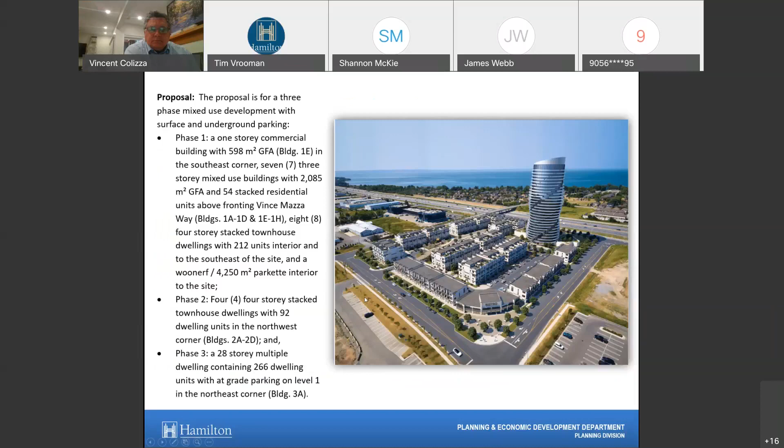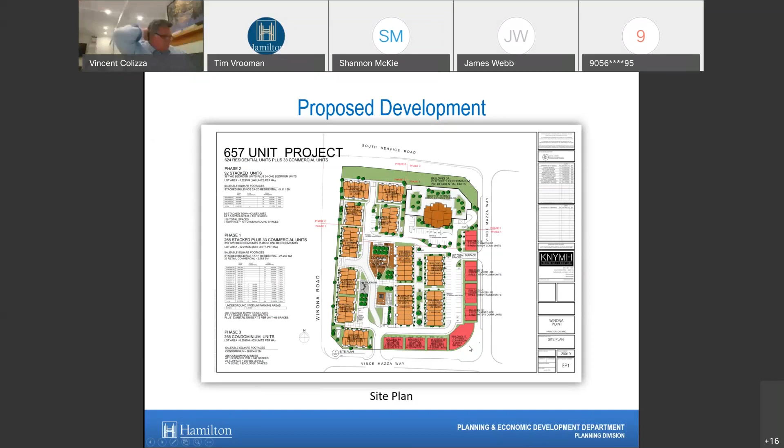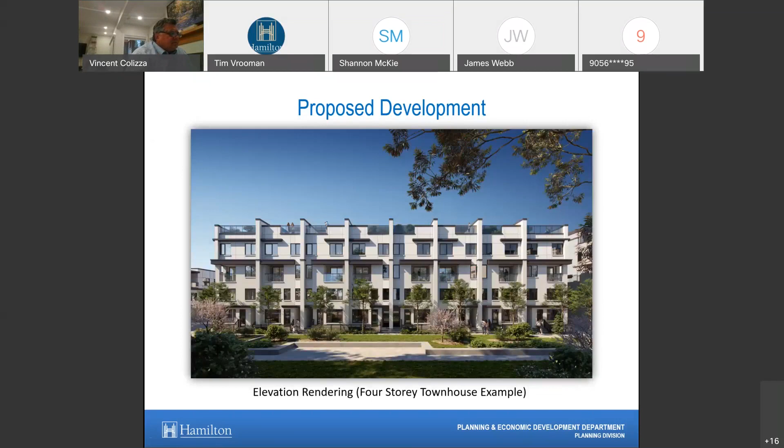This is a sample elevation of the 4-story townhouses included with the submission. Now just moving on to the policy section. This is the site's location, at the intersection of Winona Road and South Service Road.

It's noted that the planned Fifty Road transit and GO Transit and Hamilton's transit hub is located just over to the east along the existing railway corridor at Fifty Road near the interchange with the QEW.

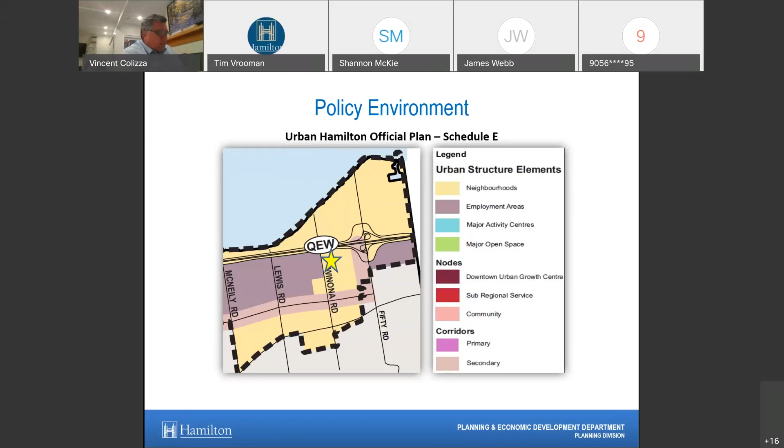The development of this transit hub is considered long term. This is Schedule E1, showing the location of the site again. It's noted that the proposed residential development is located away from established residential areas to the south, across the hydro and rail corridors on the other side, and across the QEW on the north. It's clustered among the employment and commercial lands to the east and west, with those significant barriers in between, the QEW and the rail corridor.

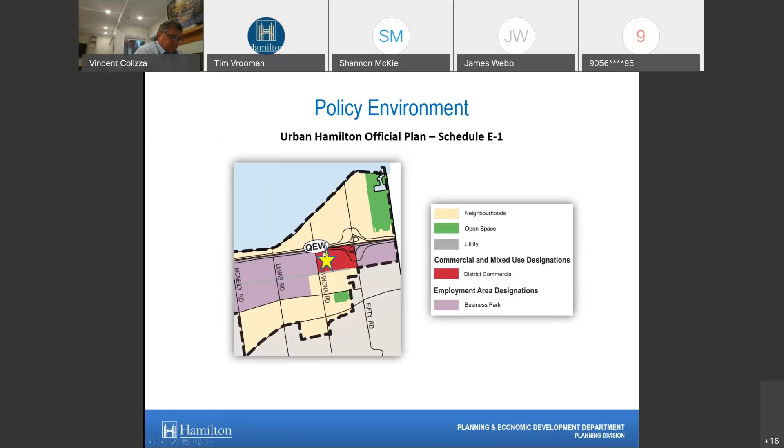From the Urban Hamilton Official Plan, neighborhoods shall function as complete communities, including a full range of residential dwelling types and densities, as well as supporting uses intended to serve the local residents. They're meant to develop compact, mixed-use, transit-supportive, and active transportation-friendly neighborhoods.

It's further designated as district commercial, which is for a range of retail uses intended to serve the daily and weekly needs of residents in the surrounding neighborhoods, and is also a focus of adjacent neighborhoods by creating a sense of place. The district commercial areas shall be planned and designed to be integrated with and accessible from the surrounding neighborhood with a range of transportation modes. The retail buildings are to be located up to the street to create a strong pedestrian orientation.

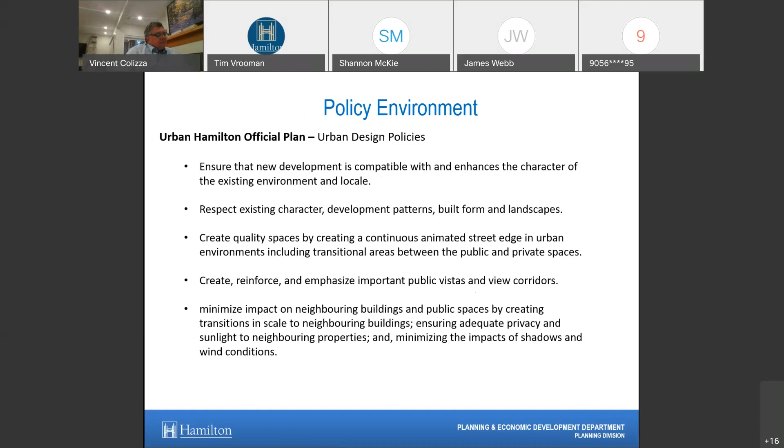The urban design policies speak to ensuring that new development is compatible with and enhances the character of the existing environment and locale, respecting existing character, development patterns, built forms, and landscapes. They create quality spaces by creating a continuous animated street edge in urban environments, including transitional areas between public and private spaces. They create, reinforce, and emphasize important public vistas and view corridors, and minimize impact on neighboring buildings and public spaces by creating transitions in scale to neighboring buildings, ensuring adequate privacy and sunlight to neighboring properties, and minimizing the impacts of shadows and wind conditions.

The property is further designated in the Fruitland-Winona Secondary Plan as District Commercial. It's also in site-specific Policy Area E, the site being located right there.

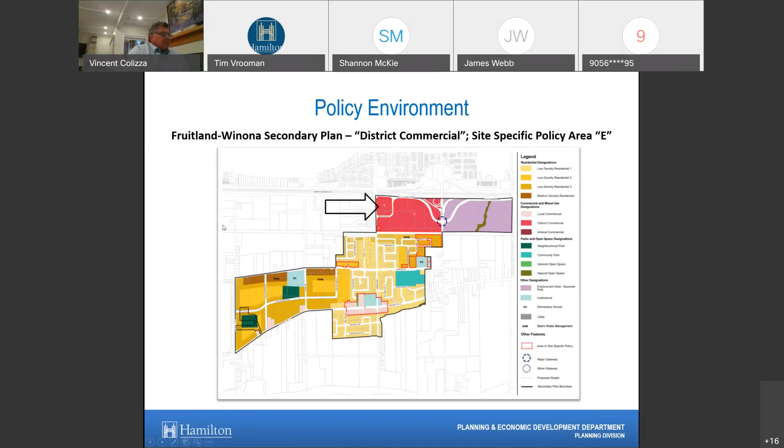Again, with the policy themes, the intent of the district commercial designation in the secondary plan is to provide for larger scale commercial areas that serve the daily and weekly needs of residents in the surrounding areas, ensuring compatibility between different land uses, and protecting the views of the Niagara Escarpment and other natural features. Development shall be designed to protect and address the views of the Niagara Escarpment.

On that note, it's worth considering the height and placement of the proposed 28-story tower, as this would be a significant transformation for the area. Built form, views and vistas, skyline, and microclimate impacts should be carefully considered, including the panorama of the Niagara Escarpment, given the location on the south side of the QEW corridor.

Design policies also speak to creating street and building design that promotes neighborhood vitality, pedestrian comfort, and promotes public transit and active transportation and recreational connections to the site. Principal entrances to commercial uses are to address the public street or through exterior open spaces adjacent.

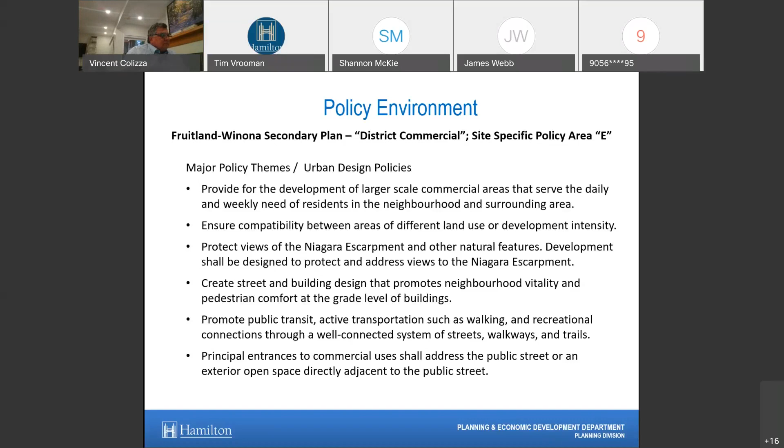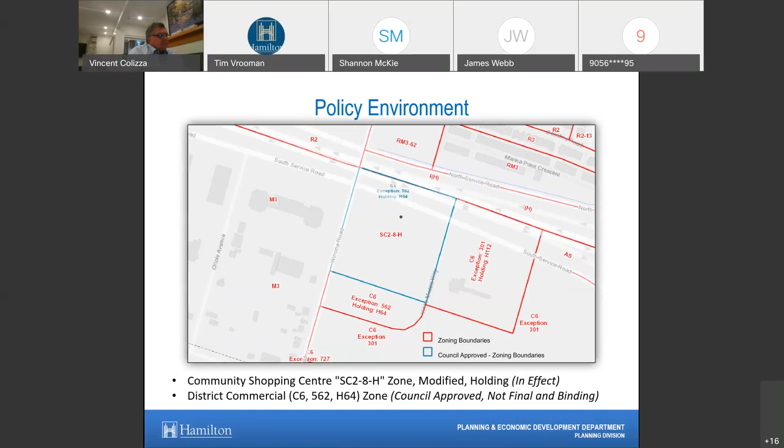The site is currently zoned Community Shopping Center under the Stoney Creek zoning bylaw. Council, through their CMU zoning, has approved the District Commercial C6 zone, but that amendment is not yet final and binding. Looking at the distinctions: the city of Stoney Creek zoning permits retail and service commercial uses, does not permit residential uses, and has a maximum height of 20 meters. The approved zoning under 05-200 also permits retail and service commercial uses and permits residential uses, but the intent is that the zone remains predominantly commercial, with a maximum height of 14 meters.

Lastly, the questions before the panel today: What is the relationship of the proposal to the existing neighborhood character? Does it maintain and, where possible, enhance and build upon desirable established patterns, built form, and landscapes? Does the proposal respect prominent sites, views, and vistas in the city? And does the proposal create comfortable pedestrian environments by locating principal facades and primary building entrances parallel to and as close to the street as possible, including ample glazing on ground floors to create visibility to and from the public sidewalk, quality landscape edges along frontages where buildings are set back from the street, and using design techniques such as building step backs to maximize sunlight to pedestrian areas?

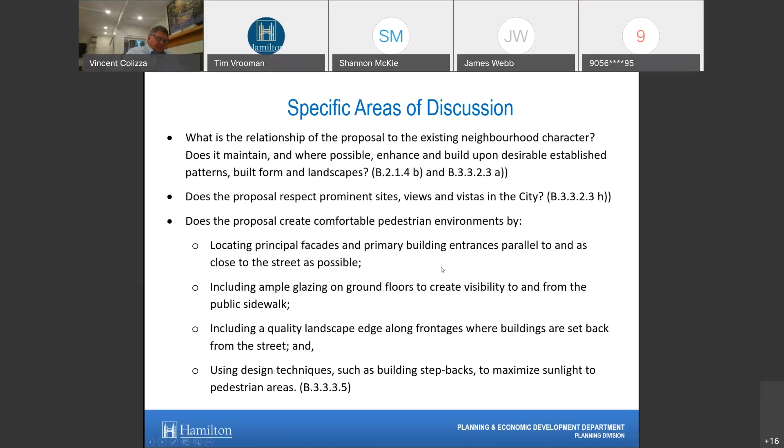That concludes my presentation. If you have any questions, I'd be happy to answer them.

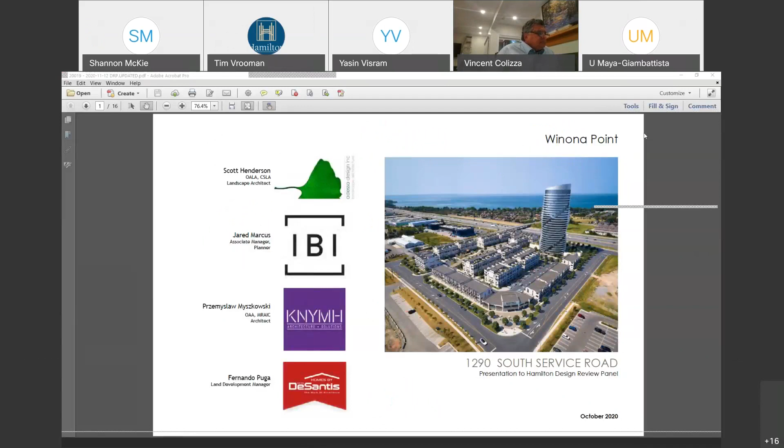I was just going to open up the presentation on behalf of the ownership group. My name is Fernando Puga. I work for Homes by DeSantis. We are joint partners with Melrose Developments and Movengo Developments on this project. We've assembled a team that we think has prepared an excellent concept. I'm going to defer to the team to present to the panel, but I want to thank the panel ahead of time for your time and consideration.

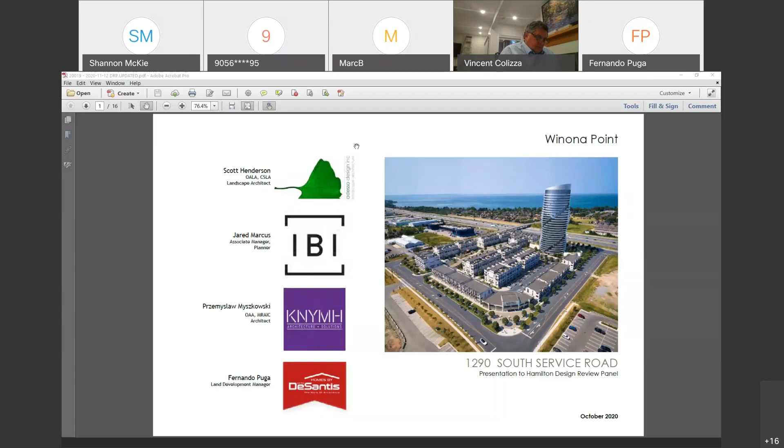I will turn the first slide over to Jared. He's going to discuss the planning and policies that we encountered throughout the design. Jared, I'll leave it to you.

Thank you, Shem. Thank you, members of the panel. Thank you, Tim, for that comprehensive policy overview. As Tim explained, we're located in an area that's largely going through transition in Stoney Creek. You have a mixed bag of land uses surrounding the development: Prestige Industrial to the west, established low-density residential neighborhoods north of the QEW and south of the rail line, and then, of course, big box store typology commercial developments to our south and east.

And the policy context, as Mr. Vrooman explained, is that these lands were converted from employment land uses during the Fruitland-Winona secondary plan process to the current district commercial designation and zoning on the subject lands today. And rightly, he said there are restrictions to the residential types of uses on the lands.

Now, when we were looking at this project, again, we saw it as an area in transition, and it differs slightly from where it was a few years ago when this initial conversion occurred. You now have the introduction of higher order transit through GO Transit at Centennial and 50 Road, and upcoming upgrades to the HSR in the area as well. And so we saw that this was an area that could benefit from the introduction of a different residential built form typology.

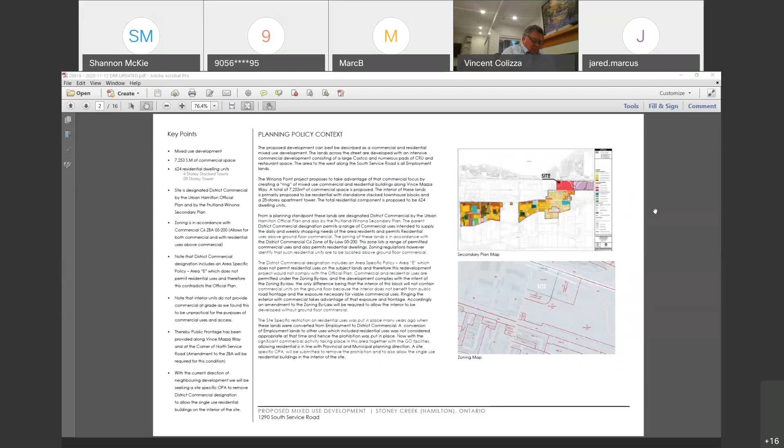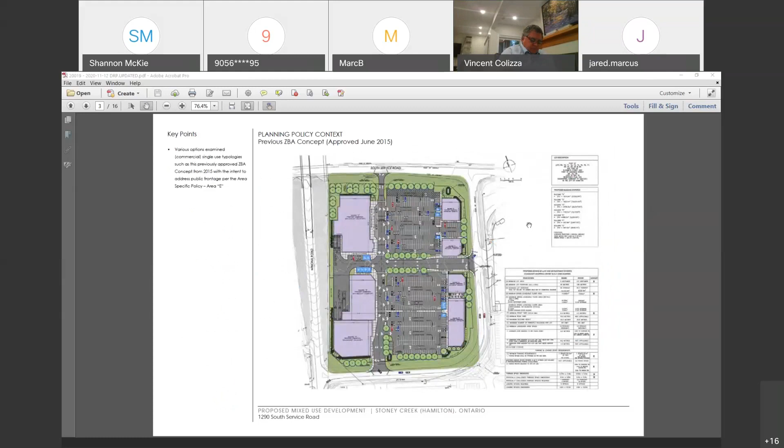Okay, thank you, Jared. I want to take one step backwards here and bring up a previous plan that was done that did respect the district commercial designation, where we looked at having essentially commercial throughout the entire site. As you can see by this plan, this was actually a ZBA concept that was approved in June 2015. However, our client, when reviewing the context, the immediate contextual area and adjacent uses, found that a mixed-use residential development was more appropriate.

We see ourselves as a linkage between Winona and Winona Park. By being mixed use, we complement both the commercial and the employment lands where we are situated currently.

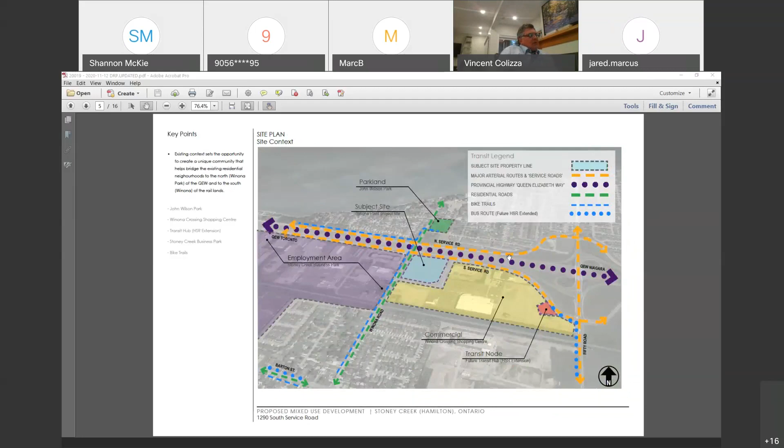As you can see by the more close-up context plan, we have a lot of great things happening here. Again, with the employment lands, the commercial lands, we have access to parks, the QEW, and bike trails going right into Winona, as well as the transit, as Jared has mentioned.

The opportunity to do mixed residential seemed like a very obvious, better solution than having just strictly commercial, which would just be adding to the existing commercial as it is. As we all know, we couldn't have known we'd be in this situation with COVID, but commercial is not as desirable right now as residential, so we tried to mix it up and accommodate both.

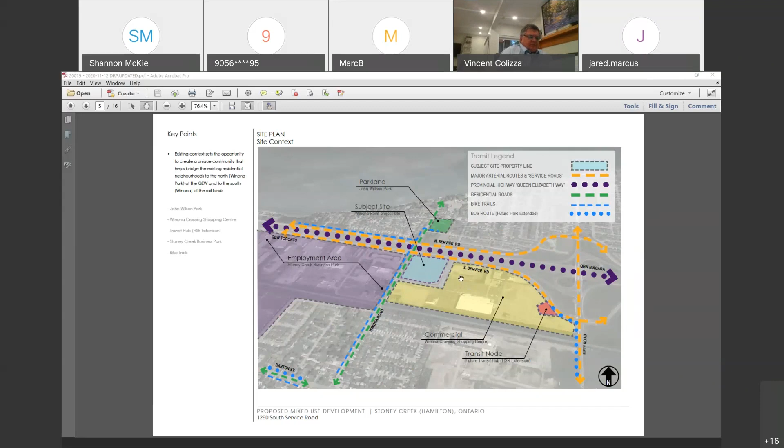As Tim mentioned, our current plan has about 12 residential blocks for a total of 624 units plus 33 commercial. What we've done is located the commercial, shown in red, along Vince Mazza Way to complement what is existing right now, and we also use it as a way of buffering the residential from that commercial.

Now, our red blocks here are actually mixed use. We have residential on the upper floors, and commercial at the ground floors. We left a little bit more of a buffer here for some public interaction and a little more public space at the corner here to address that corner as well.

Scott will get into more of the landscaping features, but I just wanted to point out that we are trying to keep this porous and open, so it doesn't feel like a typical townhouse development.

I'm sorry for stereotyping, but essentially we are trying to make this more porous, having paths so people can walk, bike, and circulate throughout the site quite freely, and it feels like an extension of the existing communities.

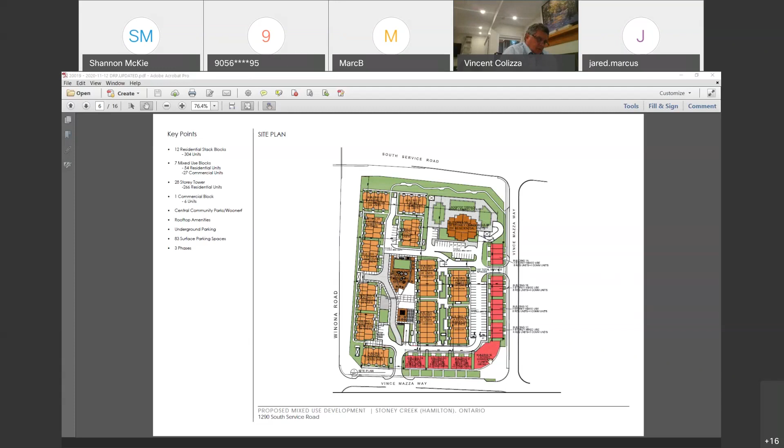It is a three-phased development. I'm not going to go into the exact phasing and how much per each, but we are thinking about how to phase this so it can be rolled out into the market properly, so that we're not overbuilding, and so we can do this responsibly if things should change.

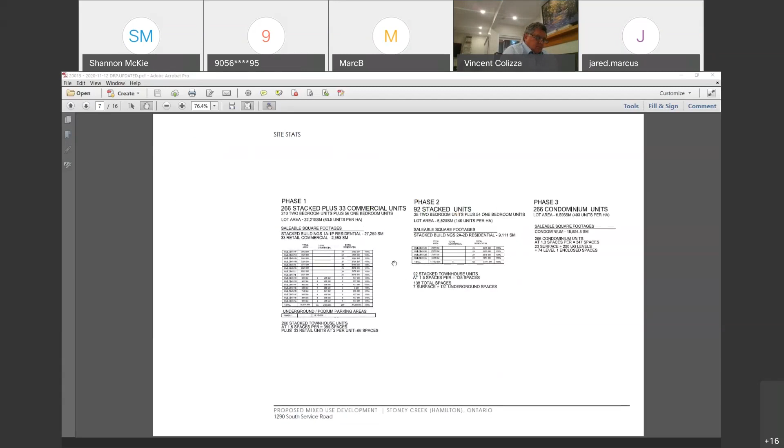I'm not going to go into the design brief. I think everybody has the opportunity to read that.

Again, the concept itself, we did try to maintain the 2 points of access, as I showed, with the commercial along Vince Mazza. We didn't want to introduce anything along Winona Road because it eventually becomes a bridge to cross to the QEW.

To provide that type of pathway, and then the corner tower to be kind of an anchor and a gateway into this entire area, because right now you have that commercial to the east and employment lands to the west, and it just helps give it its own identity within that entire urban fabric.

They're 4 stories with some rooftop access, again providing further amenity to the residents. And right along here is that commercial space.

And what we've done here, again, you can see that large kind of urban space. In order to make this commercial viable, and this was very important, and we had a lot of discussions about this, is giving that lay-by parking along Vince Mazza Way.

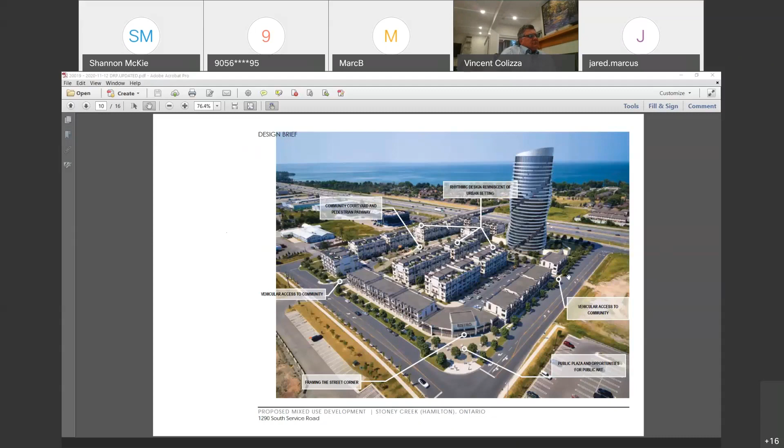I think if you're going to be doing that type of commercial development, you need to provide that ease of access and parking right in front of the stores that will benefit from clients coming in. Having the parking located within the site for these commercial units is not viable; it becomes a very cumbersome experience. I think people like to be able to pull up to the store and walk this entire area, and then it becomes a much more enjoyable and animated street in that sense.

When we were looking at massing and build form for the tower, we could have done a larger perimeter type of 16-story, 9-story building. However, we felt that this would obstruct the escarpment, and it wouldn't have been a pleasant development. Also, placing the tower towards the south would cast shadows along our low rise.

So we opted to put the tower into the north corner where it is now, which minimizes a lot of the shadow impact and wind impact. It also acts as a gateway feature for anybody driving down the QEW or entering the development.

Our low-rise product has commercial at grade with residential on the floors above. It's typical of a very human scale massing that people can relate to. It reads more like a residential townhouse development along Vince Mazza Way and against Winona.

We wanted to bring focus to the lay-by parking and commercial uses. It's very important to have that animated, walkable space accessible by visitors without having to enter the site to circulate and find parking. We found that was a key strategy to making the commercial transition work between our development and what's happening to the east.

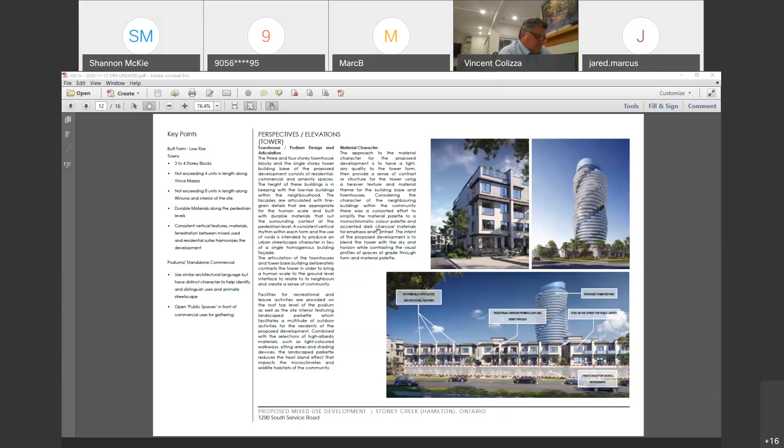Noting again that lay-by and commercial area, it can be a very active, very pleasant space. It's important to have access into these commercial units at grade, with residential above, which helps animate the street.

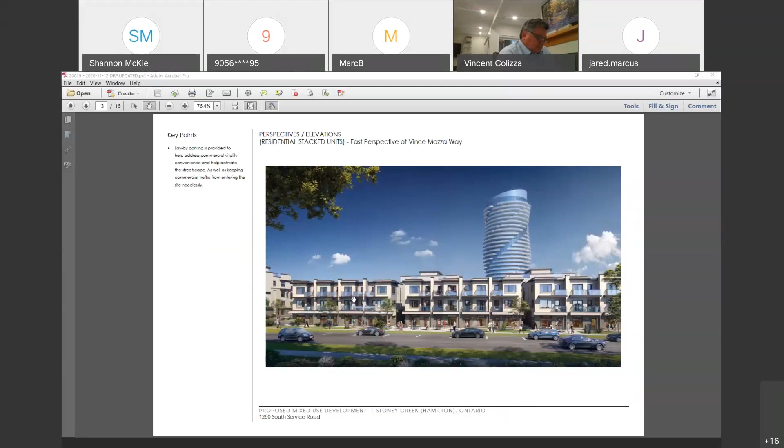These would be our typical back-to-backs, 4 stories, with some amenity space at the rooftop. We're really trying to sell the amenity for this development - that's kind of the focus. So this would be the look of our typical block.

We try to create a bit of rhythm, carrying some architectural elements like taller walls between the mixed-use blocks and residential blocks. We try to keep that architecture consistent across the entire development so it reads like one community, and through the materials and architectural gestures it ties into the tower podiums and the commercial corner at Vince Mazza Way.

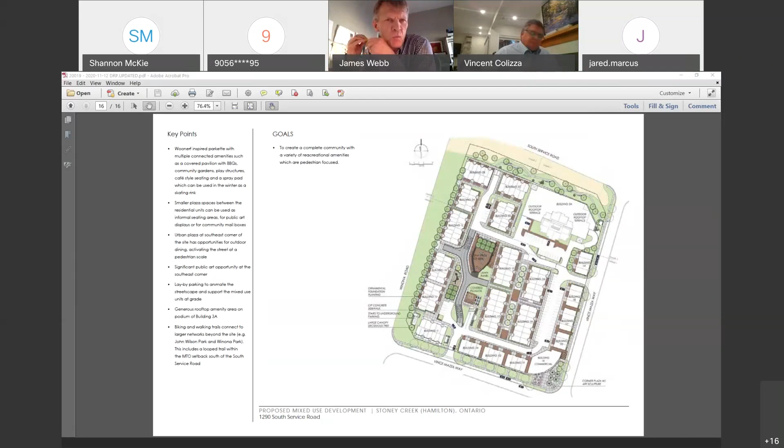Thank you, Vince, and thank you very much for the presentation. I guess I have a couple of quick questions for city planning staff. First of all, what's the status of these applications? Have they been formally submitted and is processing underway?

The applications have undergone a formal consultation, and that process will be complete. But so far, no formal planning applications have been submitted.

Okay, thank you for that, Tim. And I'm not sure if this is for Tim or Shannon, I'm not sure who may have the background, but is there any clarity as to why the policy framework presently prohibits residential uses within this quadrant? Is it a precursor to the transit evolving, or was it a matter of community facilities, or a matter of compatibility with the employment area? Any comments on that?

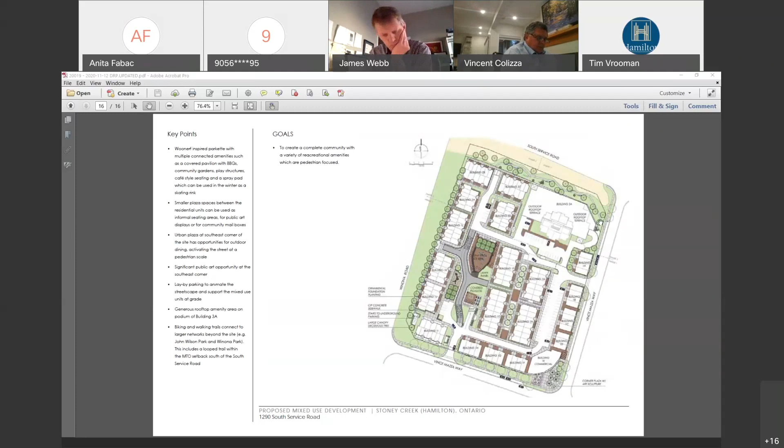James, it's Anita Fabac. If I recall correctly, and if I'm recalling the district commercial designation correctly, I believe the prohibition of residential comes from there. So when they did the commercial hierarchy, back when they brought the Urban Hamilton Official Plan into effect, that was a key policy basis that the district commercial would be protected for commercial and would not permit residential.

If I may add to that, just to clarify, it is not that the current Stoney Creek zoning specifically prohibits residential, it's just that it does not permit it. It's not a specifically prohibited use, but the district commercial does permit limited residential in the form of dwelling units above commercial uses, not necessarily multiple dwellings. So the predominant commercial form is within the zoning framework.

Okay, and I guess the extension from that, and what's actually happening in the neighborhood: there's growing residential on the other side of the railway tracks, a strong residential community to the north, and the GO and HSR transit hub that's evolving. Does that include a GO train, or is it just GO bus? What I'm wondering is, does it qualify under Places to Grow as a priority transit corridor and a major transit station area? In that case, that certainly would support a rethink in terms of the prohibition of residential uses.

So I'm not sure who can assist with that. Do we know what's coming into the GO? From my understanding of the environmental assessment, the GO station is dependent on the HSR, the LRT extension. So at this time, we cannot really provide any further comment on what will happen, as that's a longer-term matter tied to the LRT, and at this time we don't know what will become of that.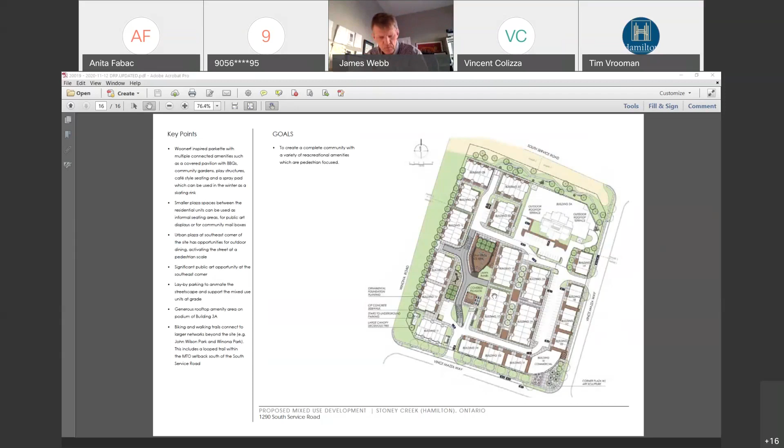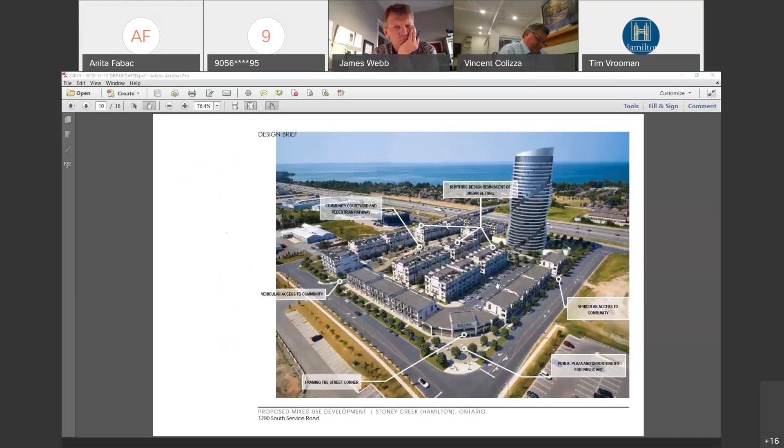Sorry James, the tower itself, I believe we're at 83 meters for the tower height. If further analysis is required, I think that would be something we'd have to provide at the SPA.

Okay, well I guess I could expand on that. Where did the 28 stories or 83 meters come from? What was the design thinking or design basis for that amount of height? A lot of it comes from just density in terms of what we can support on the site. We could have done 16 and 9-story type massing, but we felt this was comfortable and supportive in terms of the phasing, the parking, and what the area we thought would be able to support.

It's not necessarily a technical number of stories that we've defined—it was based on what the site could support in terms of distributing that massing, and the residential and commercial uses throughout the site.

Okay, thank you very much. Those were all my questions. Thank you, James. Can I ask Jackie now to make some comments or clarifications? Jackie?

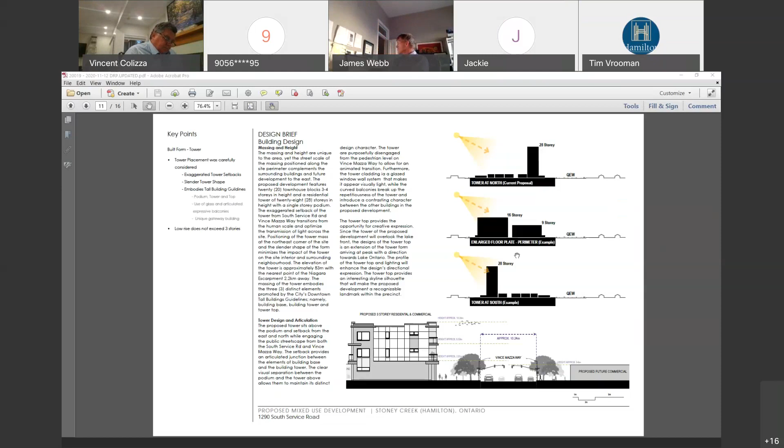It's questions, right? Yeah. Jackie, you are unmuted, but we can't hear you. Vince, do you want to maybe move to Yuta and then circle back to Jackie? Okay, we'll come back. Is Yuta here? I'm here. Oh great, okay. Do you have any clarifications?

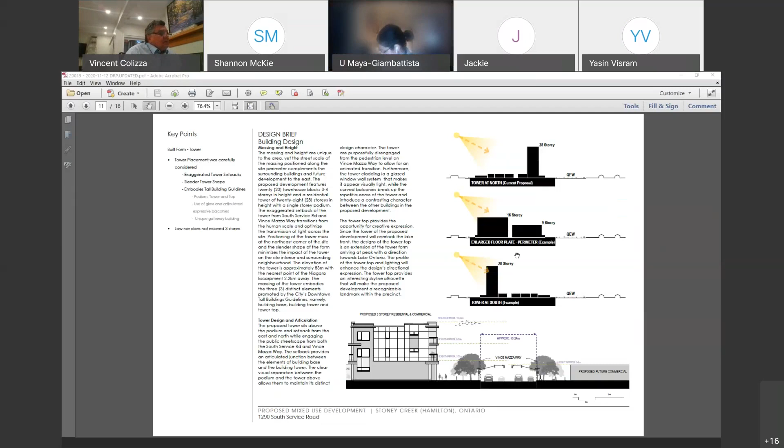Yes, maybe it's more for city staff. Is there anything in the background work looking at perhaps a secondary plan strategy for the entire node, maybe in preparation for potential GO extensions? I know Grimsby has gone through that exercise at their interchange at Casablanca Boulevard, but I don't know how this specific site sits within the larger picture of mass transit and intensification.

Was that directed to Tim, Yuta? Yeah. Is Tim there? I'm here. I would want to defer to staff within our community planning group, just if there's any further planning beyond what the Fruitland Winona secondary plan already envisions. It did outline some block servicing strategies, but this is not part of those areas. So as far as I'm aware, there isn't anything in the works for any more detailed ground-level planning for this interchange at this time.

So Anita, can't add anything to that? Through the chair, no, I'm also not aware of any particular secondary plans underway. As far as previous work done through the policy group, they looked at the major transit station areas and densities, but there's no plan to do any more detailed secondary or even tertiary planning for those station areas. Okay, thank you Anita. Yuta, did you have anything further? No, that's all, thank you.

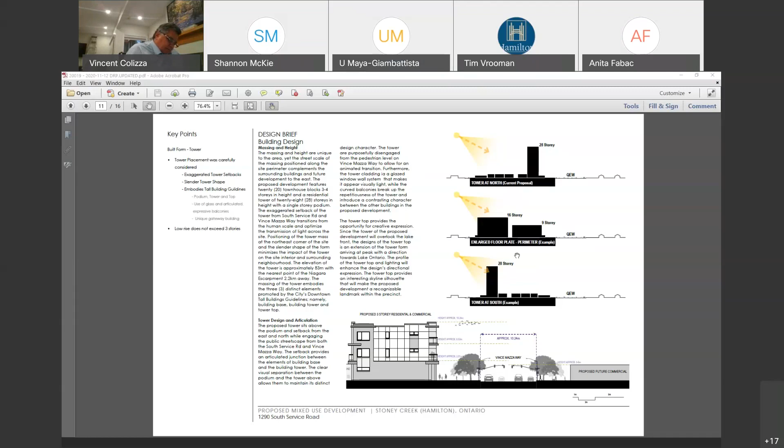Okay, thank you, Colin. I want to ask about the Woonerf at the park—is that doubling as a fire route? Is that why there has to be a kind of road through?

Colin, Scott Henderson, I've finally gotten unmuted. That was the intent—the original intent was that it would be a fire route. It's not, because a Woonerf is typically a shared road for vehicular access, so it would only be fire access, no personal vehicle access. There would be no vehicular access other than emergency vehicles.

Okay, that's my only question. Thank you. Okay, great, thank you Colin. Yasin? Yasin, you with us? I'm with you. Great. Just to try to understand it, I'm looking at your diagram on page 11, which is the concept diagram.

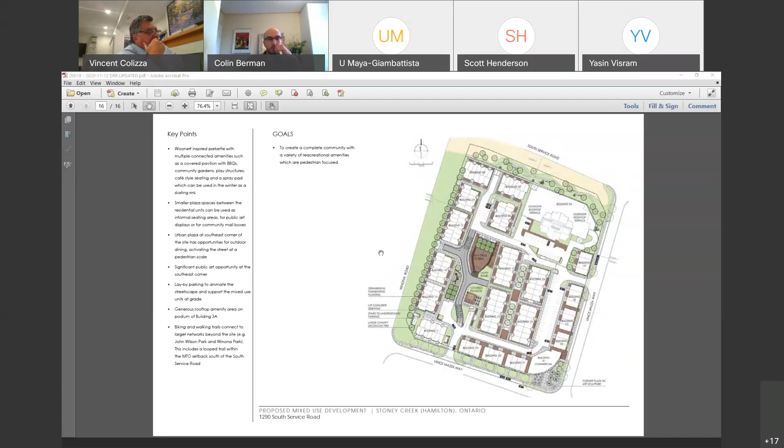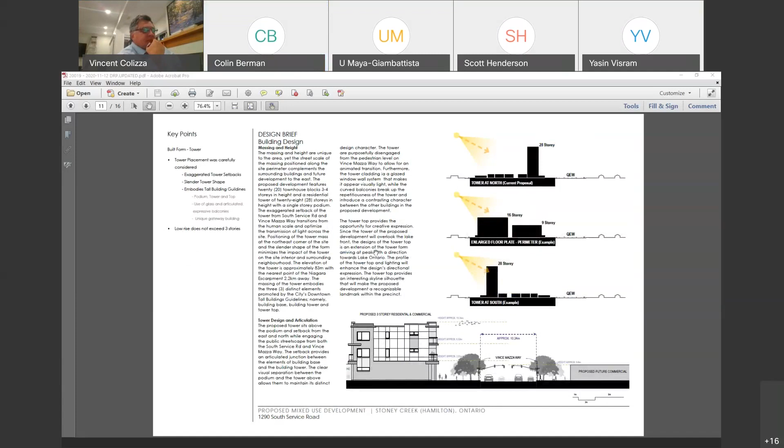Sorry, I have a different deck. I have pages 11 to 25, what you submitted for review. It's the site diagram, called a design brief.

I'm curious to understand how you thought this site related to the residential development across the QEW, because I'm trying to contextualize the residential response. Otherwise it feels like an island site on its own. I was wondering if you could respond to that relationship, because you're not recognizing or acknowledging it in your diagram.

Well, we are somewhat cut off from the residential to the north and to the south, just by sheer infrastructure. So by actually introducing residential in this area, we are trying to bridge that gap between the two neighborhoods. Otherwise, if we put all commercial or employment land here, it would really sever Winona as being a north neighborhood and a south neighborhood. So by having that mixed use, it is an amalgamation of residential from the north and south meeting with employment and commercial lands.

In terms of the vernacular of the architecture, it doesn't necessarily have to mimic either one. I think the use would have to speak to the fact that it is helping bridge that north and south neighborhood.

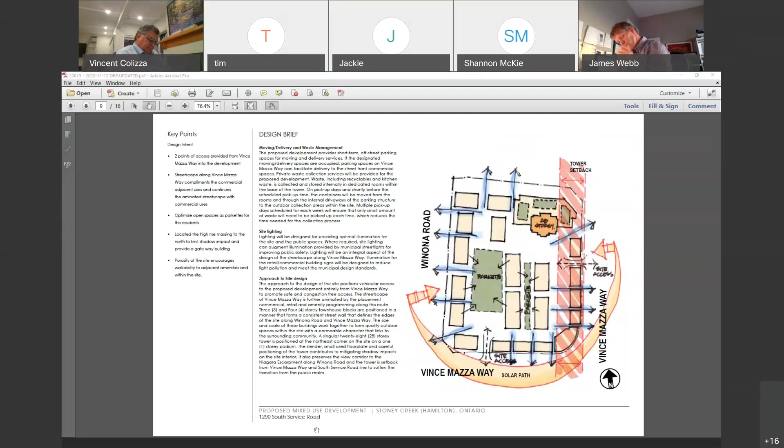I think one of the questions pertains to whether you responded to the surrounding pattern or established pattern, other than the established pattern of Massey, of Winona and Vince Mazza Way and the internal driveway routes going through the big box plaza.

There's nothing that you can respond to. So I think it falls within your purview and responsibility to actually develop or envision what that future node can evolve into.

Which will have a ripple effect on how you strategize your own little corner, especially in where you locate your mixed-use retail.

I don't know if where you're locating the current retail as shown on this diagram is where it makes sense. Maybe it makes sense further along or further west or east towards the potential redevelopment of the Costco site.

I really don't have a good sense of how you can strategize and locate your different elements without having a bigger picture.

And once you go through that exercise, I think the pieces start to fall into place.

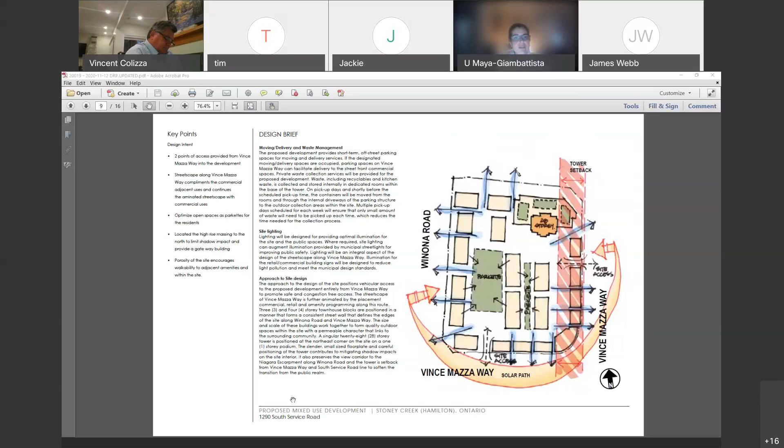So there's no stark transition from a tower to a sea of, I don't know, 6-story, 4-story buildings. So thank you for coming, and hopefully we get to see the evolution of this project. Back to you, Vince.

Okay, thank you very much, Yuda. Colin? Again, thank you for coming early. It's great that we get an opportunity to have a discussion with you early in the process. Your presentation was great. You're clearly thinking of some of the right urban design principles, like on-street parking, organizing the interior of the site around a central park-like gathering place.

I would really emphasize, as Jackie did, the importance of that park. And I think you've done a good job of grasping the importance of that and creating this central space. What I think could be improved is how you get to that space.

I see, on this graphic here, the kind of central park and then a linear park up and down. I think you could think about it more like a central park as the heart of the site, with a series of greenways or linear parks leading to that space.

Really, the test you want to pass is: for people living here, would they feel comfortable letting their kids walk to this space on their own? And to do that, you want to minimize the number of streets or internal roads they're crossing.

And when people do have to cross those roads, you prioritize the pedestrian in that scenario, especially if you're talking about skating, which is wonderful, so people are going there all times of year. So you want to make it as safe as possible.

I question the decision of creating a parkette on the southeast corner there, or a kind of plaza on the corner. I've just seen too many times in this kind of context, with really busy, fast, harsh arterial roads, too many communities across the GTHA where those little corner plazas are devoid of humans. I'd hate to see that here.

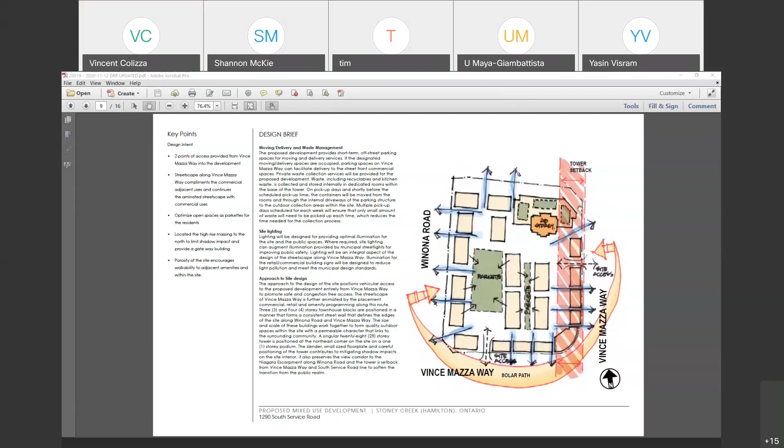Hello? Vince, you appear to be cutting in and out. Okay, I'll try and keep it short then. Can you hear me now?

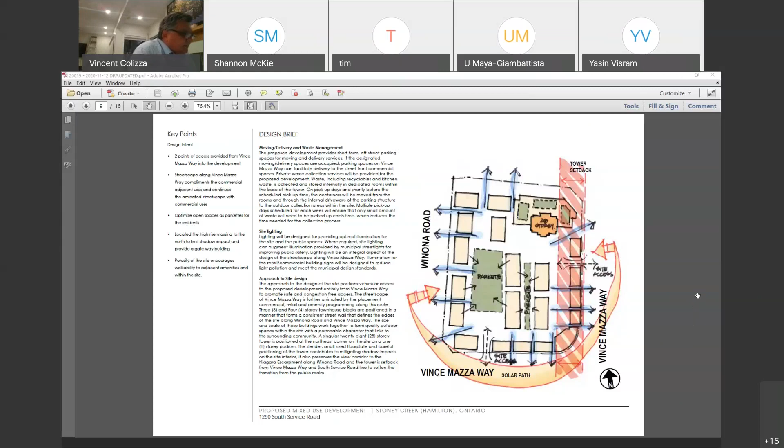Yeah, okay. I think the notion of converting this site's use from strictly retail and commercial to residential is up to the city - that argument's not for this panel. But the notion of how the site should be treated, or options for how it could be treated, I think the comments made so far are on the money. The notion of higher densities towards the north with some mixed mid-rise density makes some sense.

The notion of a green in the center of the site as a large park, with the housing wrapping around it, perhaps even access to the garage at the edge of the green in some places, makes sense. The notion of how the retail is going to work - on which face of Vince Mazza Way, whether the east face or the south face - I think the way you're planning it really gives you the options to provide retail if the retail works. That's pretty well it. It is an island within itself, trying to bridge the north and the south. I think there's merit in what you're doing.

I think at some point there should be a rethink of how much commercial we provide along the QEW, and the notion that in the future we need to look at introducing residential uses to keep the vitality, because the commercial uses will continue to be in transition. We're experiencing that right now, where we're looking at redeveloping existing commercial sites and introducing residential uses, and it's helping to support the performance, or lack thereof, of the retail. So I think we'll leave it at that.